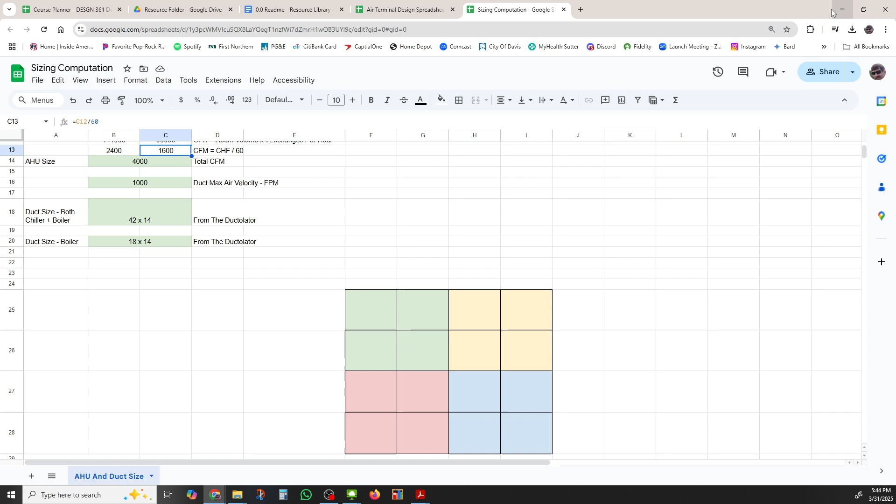So here's an example. Here's the chiller room. And what I did is I cut it in half, and I cut it almost in half. I could have done a little closer than that to cut it in half. But this gives us the basic idea, and then you can get a little bit closer. And then I noticed that it's kind of oblong, so I cut it into 1, 2, 3, 4, 5, 6.

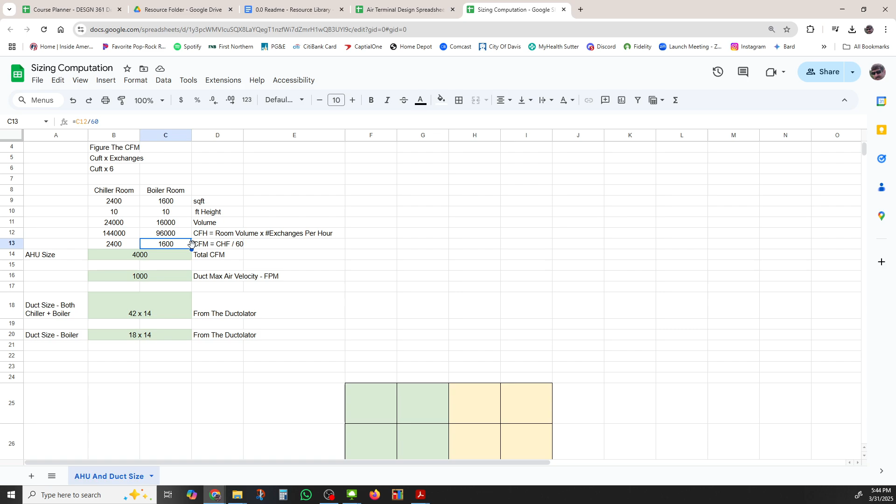So this area needs, I think, 2400. Let's see. Chiller room 2400. If I have six of them, these are each going to take 400 CFM. And so I'd want to size it that way. And it's almost close. And when I get to putting my branches in there and getting a closer position, I can make this a little bit closer.

I could, for instance, move this over so that it's like 10 and a half and 10 foot 8 and 10 foot 9. 10 foot 8 and a half, 10 foot 9. Now it's really close. So if I were to move those over, that gets us closer to this 9999 also. Okay, so I can move that one over. Okay, and so you can just sort of play around with that a little bit.

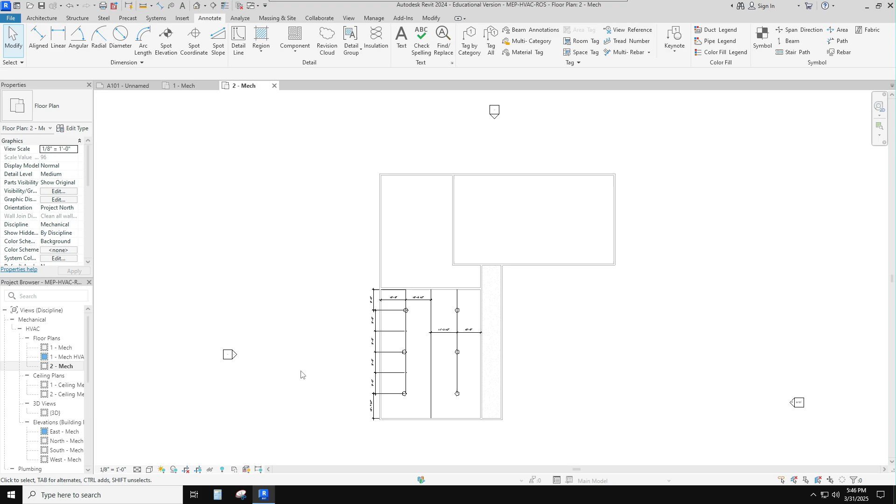And I've got a little bit of extra room down here, so I could make these like 9 foot 2 inches each and get that a little bit closer, or 9 foot 3. I can get these so they're sort of close to each other. And then I would do the same thing up here. I don't really need this little area over here. The air will bleed enough going in over here. Okay, so you're sort of free to play with these areas as you wish to get these air terminals placed properly. Okay, so that's how we figure out where the air terminals will go.

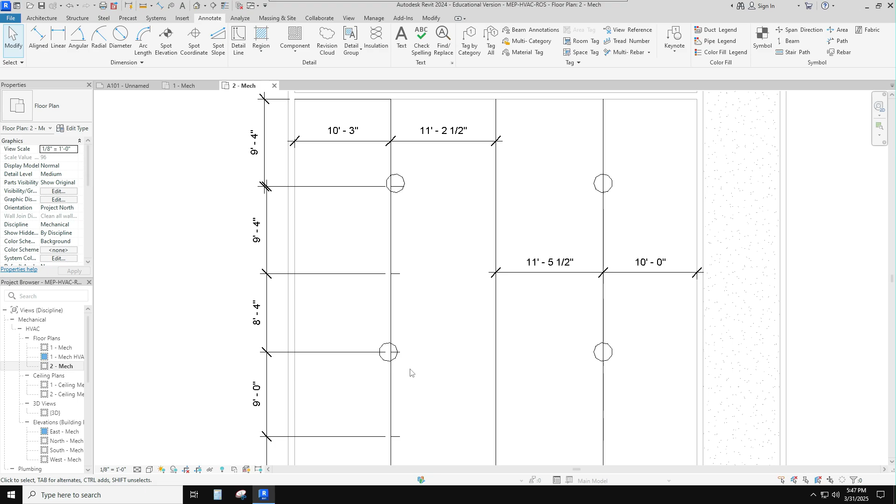And I'm going to put mine at 10 foot, whoopsie, sorry. I'm going to put mine a little bit closer to 10 foot 4, 10 foot 3 maybe. And I'll move this one down 9 foot 4, 9 foot 4. See, they're pretty close to each other. And air doesn't go out exactly like what you want it to, by the way. 9 foot 4. Let's see what that ends up with. That's off a little bit too much.

I'm going to make these 9 foot, a little bit closer to. Nah, I like my 9 foot. I'm going to stay with my 9 foot. 10 foot 3. Maybe I'll make that a little bit farther over. 10 foot 6 and 10 foot 11 and a half. 9 foot down, 10 foot 6 and 10 foot 11 and a half.

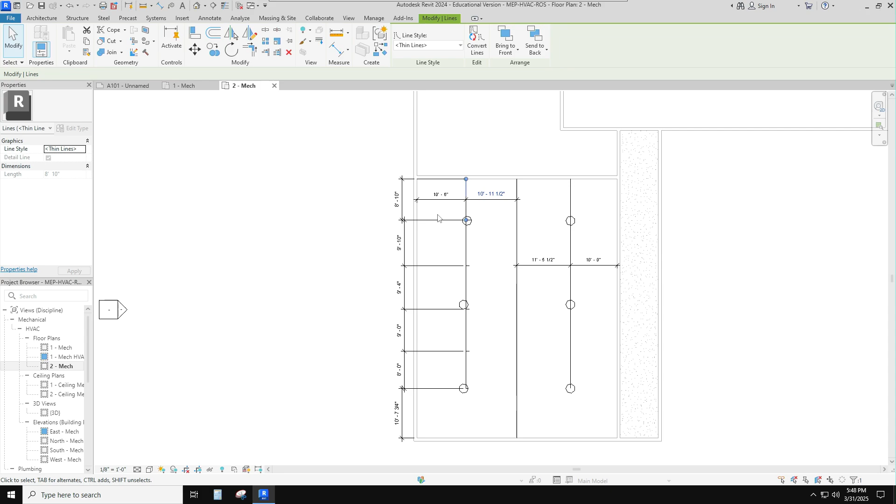So I'm going to keep those in my mind, and you just need a sketch of this. This is part of your backup documentation. You will want to have this as a document that shows what your dimensions are for your throw. And I'm going to call the throw 10 foot. Okay, there we go.